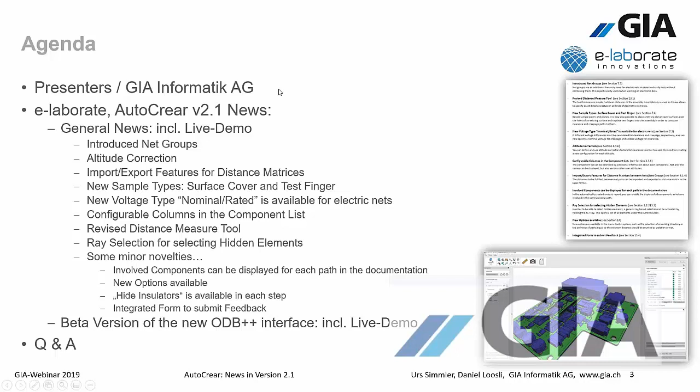Let's start with the presenters. Right now you hear Urs Simmler, I'm a CAD simulation specialist. I'm working for a reseller of e-laborate called GIA Informatik, and we are located in Switzerland.

My colleague, my sales guy of GIA, is Daniel Loosli. Here are his coordinates. And I'm very proud to announce Michael Martinek, the founder of the company e-laborate. He's the CEO, and he's the brilliant brain behind that great product AutoCrear. So he will show you quite soon the news of AutoCrear version 2.1. Many thanks to Michael for taking the time to join us.

Some words about GIA Informatik. GIA Informatik is a PTC reseller, located in the middle of Switzerland. Beside the CAD CAM products, we are also an SAP reseller. We have IT services, and we'd like to support our customers with the following products in the CAD environment.

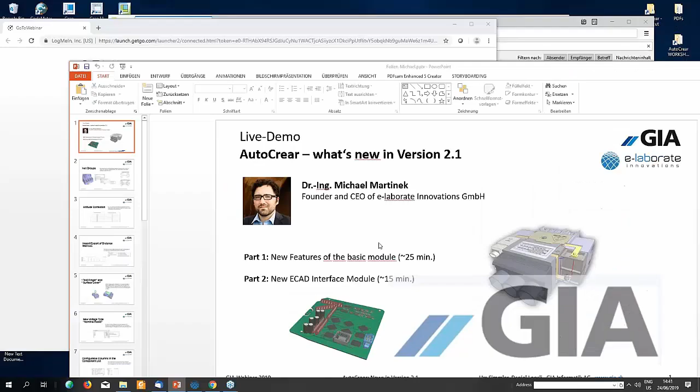The purpose of these non-uniform net groups lies more in the documentation. And for this I would like to give you an example. So let's switch to AutoCrear.

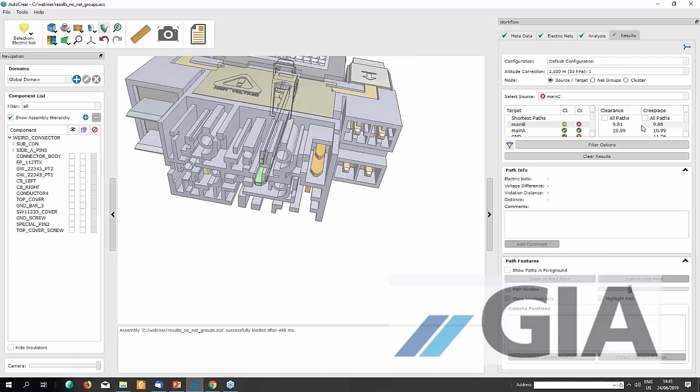Suppose you have some electric nets. Let's take these three nets here, Main A, Main B, and Main C. These are three individual nets which have requirements between each other. We can see the distances also in the classical way here. But now imagine you want to know what is the global minimum distance between the entire group of these three nets and, let's say, this screw, for example, here.

In order to get this, in the previous version, you would have to go through all the individual nets here, Main A, Main B, Main C, and then check the distance to the screw, and then add this information manually. So the documentation you would have to do manually as well. And this we can do better now with net groups.

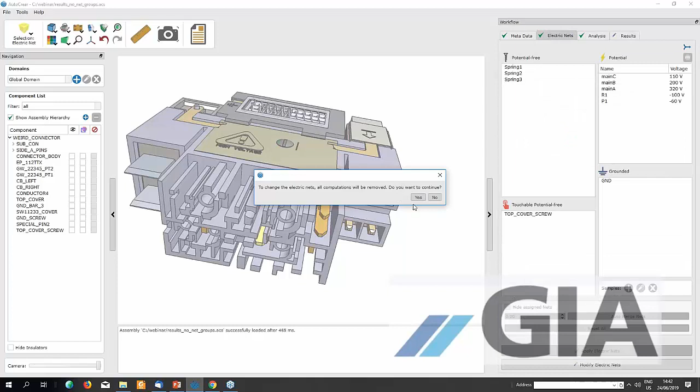So for this we go back to the electric net definition, and here I can select these three nets now and tell the program to group them together. Let's make a new net group here and call them Mains.

Here, as you already saw in this drop down, there are two net groups already here. These are global net groups. I will come to them later. Now we have a new group. I can also assign them, for example, to a group. These are the sides as they are on the two different sides of this assembly.

And now you have a new kind of display here in this list. You can also switch back to the traditional display where you see the individual nets. However, they are at least colored in the color of the group. You can also edit your local net groups. Here we have two active net groups. You could change the color, change some more settings.

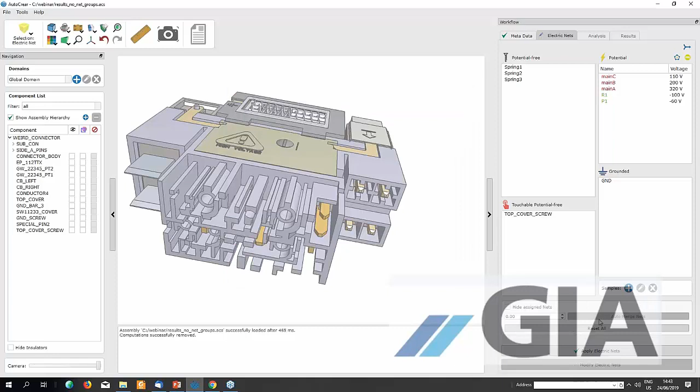And if I perform the analysis now with this kind of... this is more cumbersome than on my usual screen because I only have one screen here on my laptop. So yes. No. Only allowed to open it once.

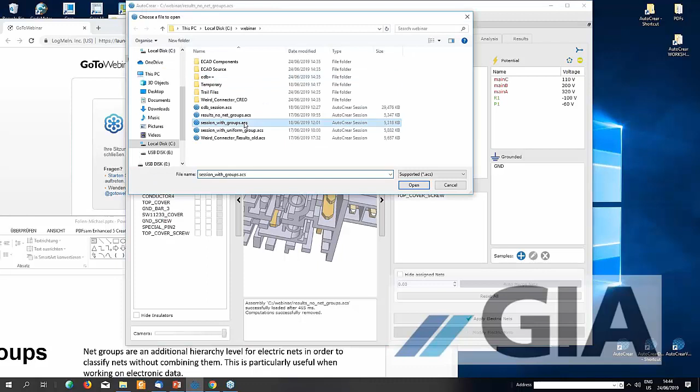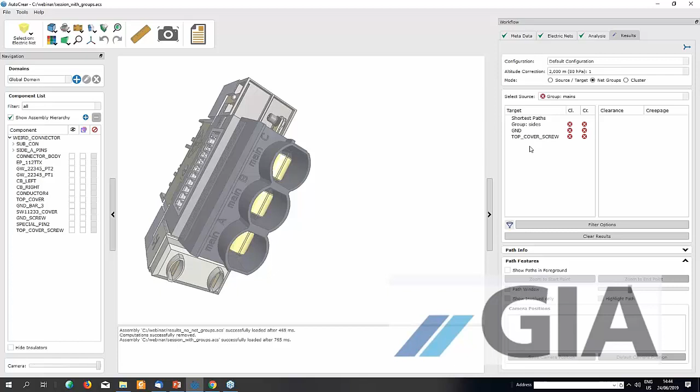So here we have a session with groups. So if we compute this in the setting we just made, we can switch here to a new kind of result display. So while in this mode you can still see the traditional individual nets, here in the net group setting, I can select an entire group as a source, and now I have this screw as a target, and this is exactly the list I wanted to have here. And I have this now in one single view.

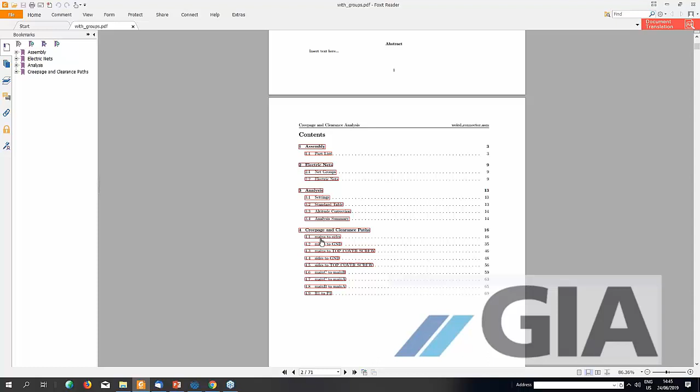This will also be in the documentation. Let's open an example here. So in the documentation, when I start the document tool, you now have a new option here, list net groups. If you activate this, the net groups will also be considered in the documentation, and will look like this. For example, here you have the mains to the top cover screw. This is the example we actually wanted to have.

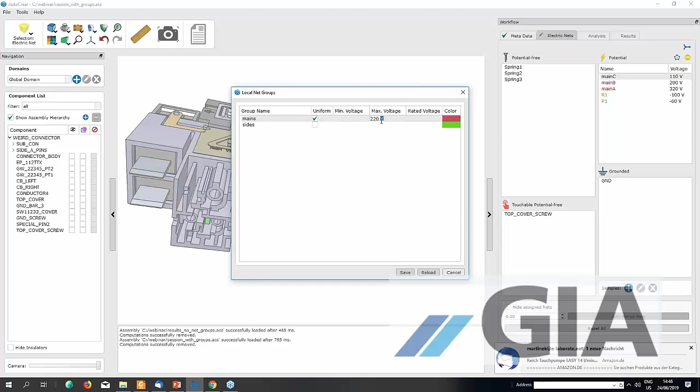In contrast to these non-uniform net groups, where all the individual nets inside the group retain their individual voltage values, we can also define uniform net groups. If I do this, let's edit the local net groups, make the mains uniform, then all the individual nets have the same voltage. I can type in the voltage here, let's say 100 volts, and then you see here that all the individual nets get the same voltage value.

And I cannot edit them anymore. And if I go on now to the analysis parameter, then you can see that you only have to choose the group, and you can define all the values to the other nets, or if I choose another net, you only have to define the distance to the group. You could have the same effect when you just merge together the nets to one net, but then you lose the information in the results tab, because when you do it with groups, you can still choose the individual nets display.

Then there is another thing about net groups. The net groups I just defined in the way you saw are locally defined in the session. They are also stored in the session. If I reopen the session again, they are still there. But if I open a new session, you would have to define these groups anew, unless you define global net groups, which you can do in the tools, net groups, and here we have predefined two global net groups, and they are always available as an option in the assignment of net groups, as you have seen here.

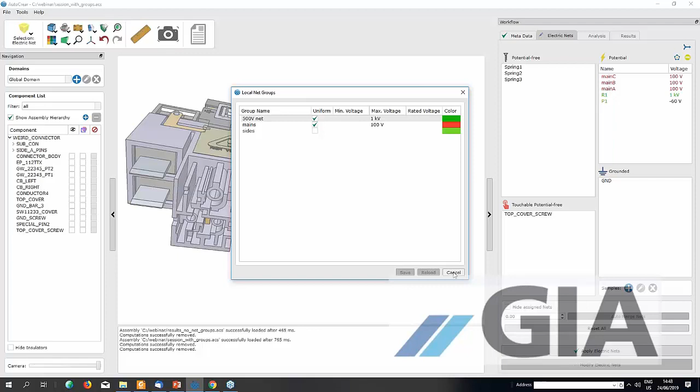Here are the global net groups and the local ones. If I assign a global net group, then you get a local copy of the global net group here in the local net groups, and I can make changes here, for example, change the color, change the voltage, without affecting the global net group. Okay, I think this is all I can say about net groups.

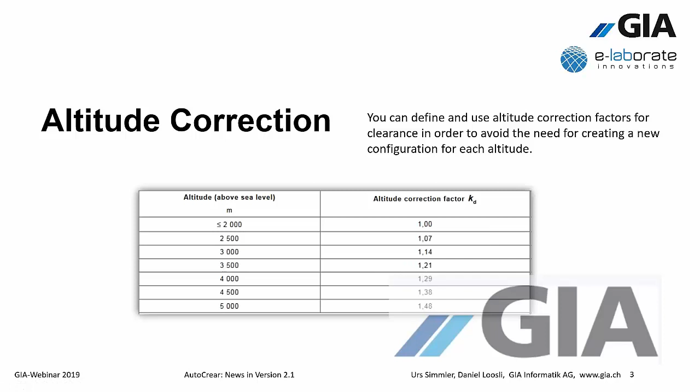Let's continue with the next feature, the altitude correction. Altitude correction is meant for assemblies which work above 2,000 meters sea level. So we have requirements in standard tables which are below this value, and if you go higher with your assembly, you need to multiply your distance values with a certain factor, and according to the height you see the factor here. This is one example of an industry standard, and you can now use such tables also in AutoCrear, and let me show you how. So let me first of all reload the session with the results.

So the first thing you need to do, as an initial step, is bring tables into the program. You can do this here in Tools, Altitude Correction, and this works very similarly to the standard tables. These tables are stored in an external file. You can edit them in Excel.

You can also edit them here in AutoCrear. You can also create new ones here in AutoCrear. By this you can bring as many tables into the program as you like. For example, I have established three of these altitude correction tables here, and once you define them, you can use them in the analysis tab.

So where you define your clearance and creepage requirements, here in this section you can now choose one of your tables, and if you do this, click apply, then here you will receive the information that you use altitude correction, and you also get the maximum multiplication factor. So when I perform a computation now, the standard values are taken, but the computation is done not to this clearance value, but to this multiplied with the maximum factor plus the tolerance, of course.

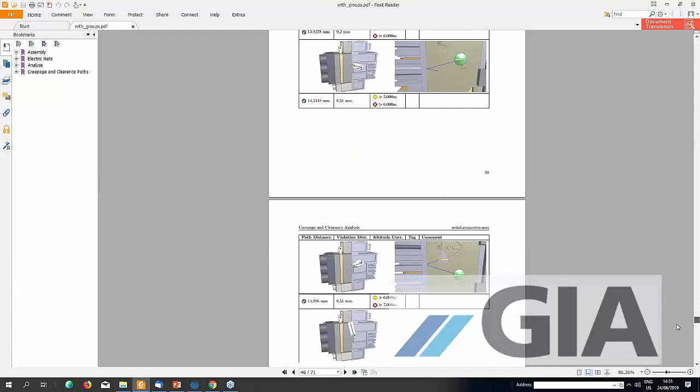Before that you would have to perform new analyses on different configurations, but now you can hold all your altitudes in one configuration. This also has an effect on the documentation. Let me try to find one here, for example. This is a clearance path which is okay for the basic rule, but you have here the additional information: above 6,000 meters it is a minor violation, and above 7,000 meters it is a major violation.

I would also like to point out that we recommend you use an altitude correction table only up to the value you require. Otherwise you would waste a lot of time. For example, if we always applied this table here, which goes up to 20,000 meters, the maximum factor for 20,000 meters is 14.5, and computing 14.5 times the clearance rule will probably take 200 times longer than the basic rule. So make tables only up to the height you require, in order not to waste your time with unnecessary computations.

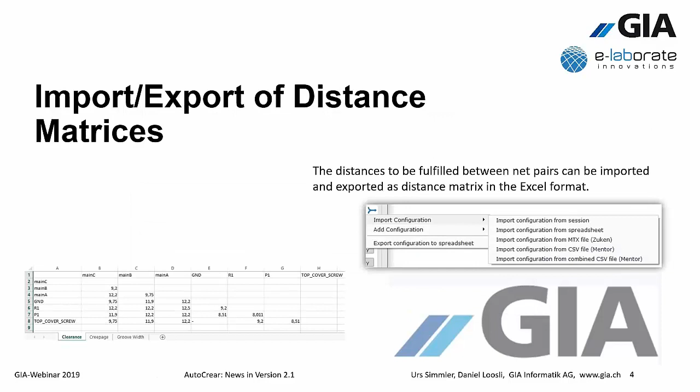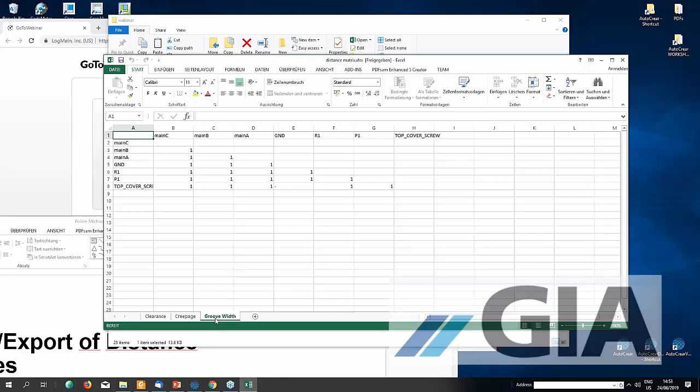The next feature I want to introduce is that you can import and export matrices for the user parameters. I have an example here. You might have such tables where you define distances directly between the net pairs, or also your net group names and net group pairs. One for clearance, one for creepage, one for groove width. And if you have such tables, you can now directly import them into AutoCrear.

Let's make a new configuration. So now we have a naked configuration. There are no distance values here, and now I can go to this option here, import configuration from spreadsheet. Now I can choose this matrix, and you see the values are automatically filled with the values from the matrix. You can also export such a matrix from the program with export configuration to spreadsheet. Then you can create such tables from your current parameter configuration.

So the next thing is the test finger and the surface cover, which we introduced as additional features for the samples. Samples are part of the electric net definition. In the previous version, you know, you can distribute points on your assembly or surfaces, and now we extended these features by these two additional elements. Let me show them here live. If I add a new sample here you see the options. These are the old ones, and now a surface cover

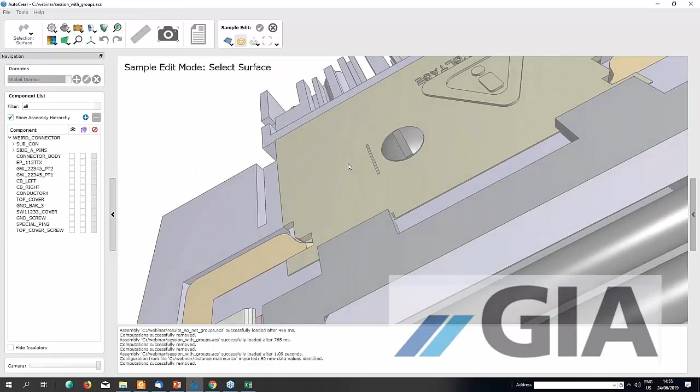is a way to cover holes in your assembly. For example, if you want to cover this hole because you might need to fulfill distances from the interior to a virtual metal foil covering it, then you can just click on this surface here and the holes will be covered automatically.

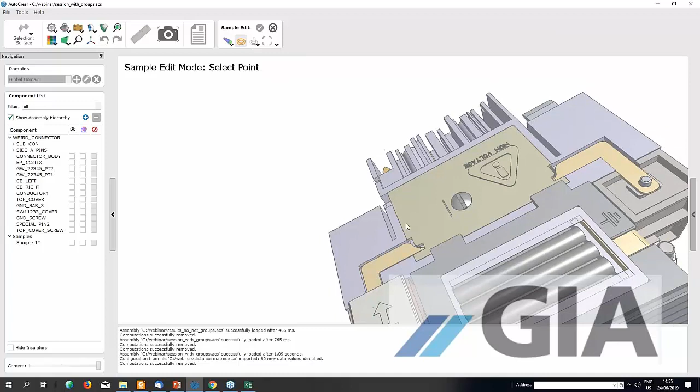The other new feature is the test finger, and we introduced the EN 61032. This expects you to define a reference point where the finger will initially be placed, for example this one, and it will be automatically oriented on the surface normal of the point you clicked. You can now additionally move this point along its normal.

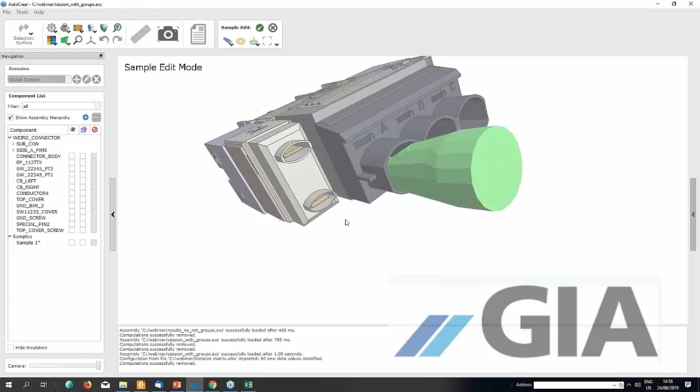Well, of course, there is more to come, with more handles where you can move this finger freely around. This is the first version, where you have a very simple way of placing this finger by a reference point and an offset.

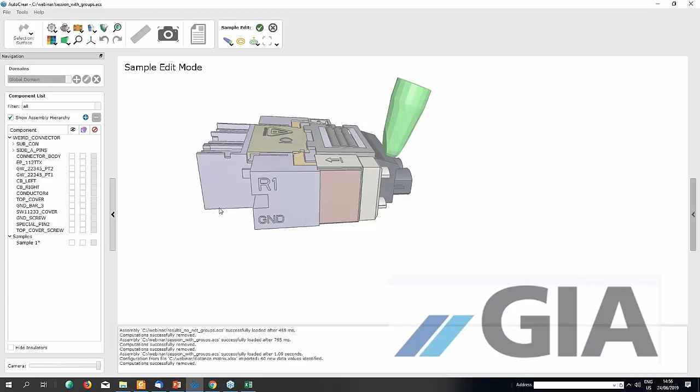And if you need other test fingers than the EN61032, then tell us and we can introduce more of these fingers here. And if you apply this, you have the finger as a regular electric net, and you can compute clearance and creepage paths to this finger.

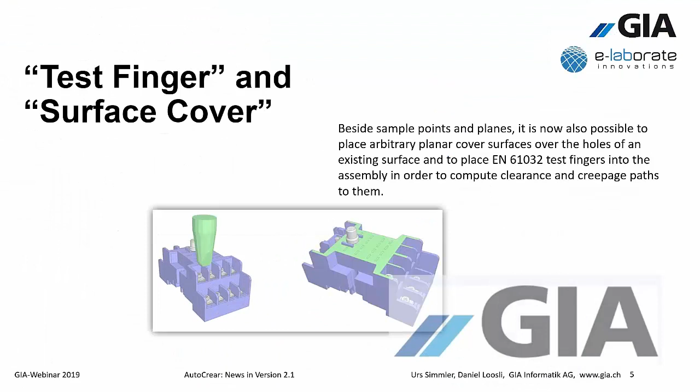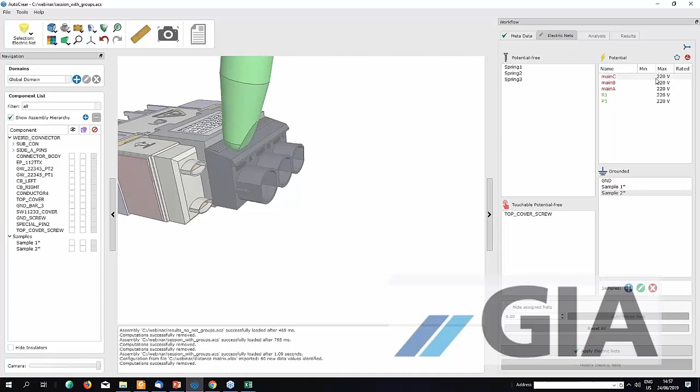So then we introduced a new type of voltage. This was motivated by the fact that we now can work on ECAD data as well. And in this ECAD data we have seen that the clearance and creepage often refer to different types of voltages. So the regular voltage is referring to the creepage values, and the clearance rules are often defined on the voltage difference according to some peak voltage, which occurs only for a very short amount of time.

For example, if this net has 220 volts actually in the working voltage, but in peak it can have 500, then you can type it in here, and for the standard tables the maximum voltage difference between two nets for the clearance will be taken from the rated voltages, whereas for the creepage it will be taken still from the regular voltages.

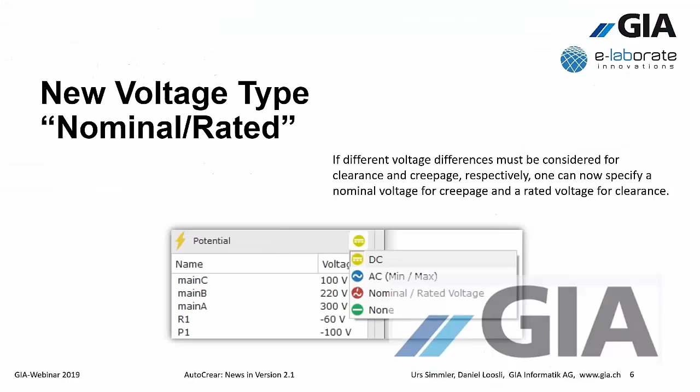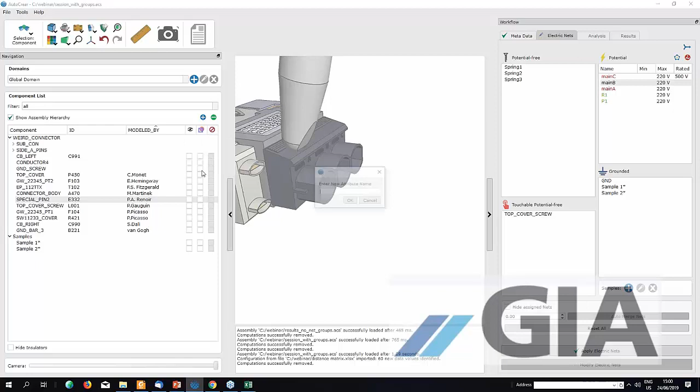What you can also do is you can change the values of these attributes locally. So you have a local copy now of your attributes. You can change it for your AutoCrear session if you like. Or you can also introduce entire new attributes which only live in your AutoCrear session, which is maybe suitable for documentation. If you need some attributes for your components documented in your analysis report, then you can type here arbitrary strings, and they will be documented then in the report without changing your original geometry, original CAD data.

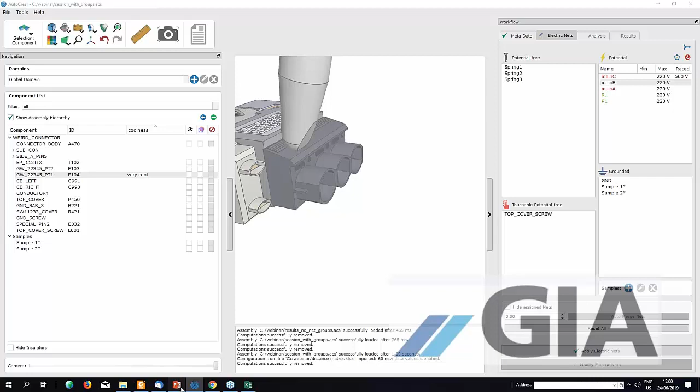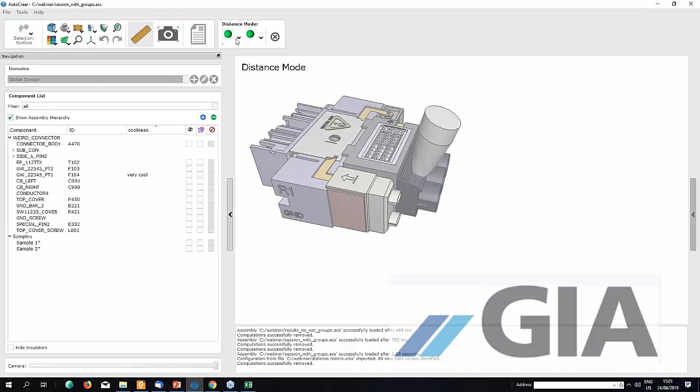So then we revised this tool where you can measure simple distances, which is a general tool which you find here. In the previous version, you could just select two arbitrary points. You get the Euclidean distance, and now you can choose more geometric elements. For example, a point, and it also makes an automatic snapping to the closest corner or closest edge. For example, I want to have the Euclidean distance between this point and, let's say, this surface here, and then you get the Euclidean distance here.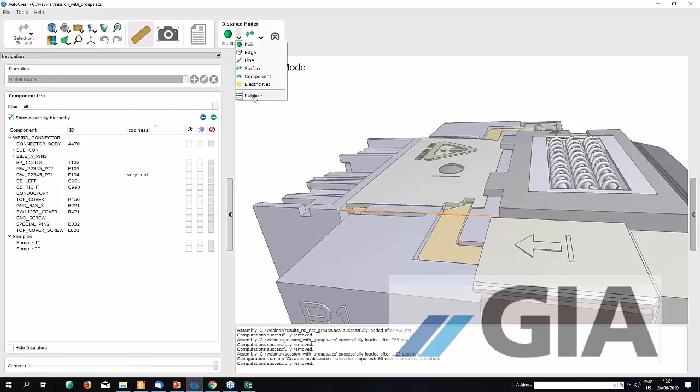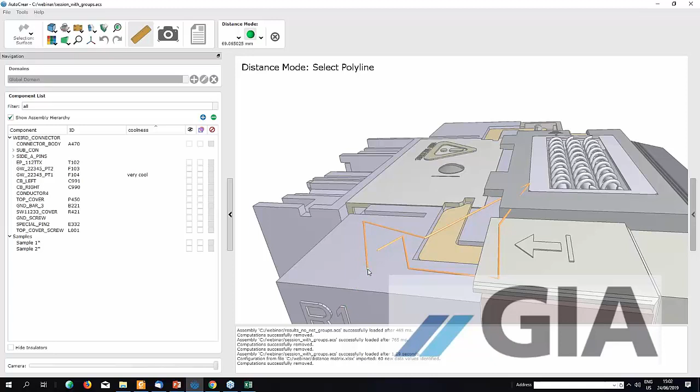This also works on other types of elements. Or you can also measure the distance of an arbitrary polyline. If I choose this option here, now I can draw a line here, and you get the distance of this line here in this section. This can be useful if you maybe miss some paths which were not computed for some reason, and you want to measure a manual path in certain areas. Then you can do it with this tool here. But actually, it's not necessary because you get a good path from the computations.

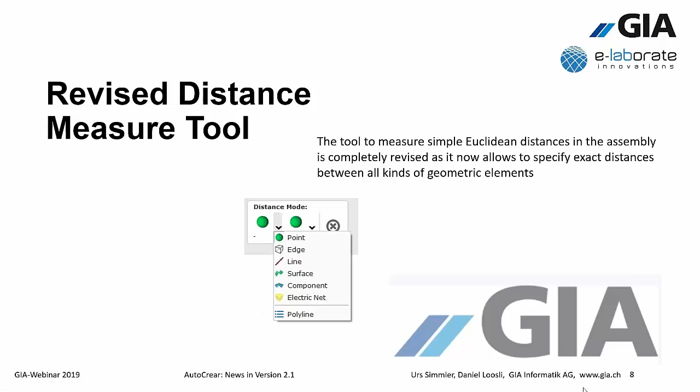So then this feature we introduced because a lot of CAD tools have this. If you select, here in this case a component, then you always get the first hit below your mouse pointer. If you want to select things which are further inside of the assembly, you can hold the Alt key, select again, and then you get an entire list of all elements which are below the mouse pointer. So it's a kind of ray we shoot into the assembly, and you get the list of all components we hit with this ray, and you can select them here.

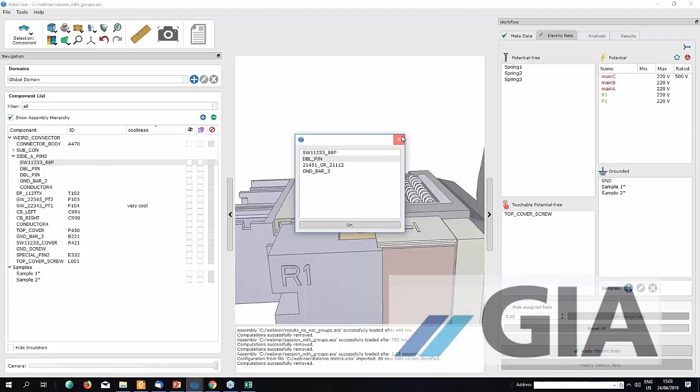This was inspired, as I said, from many CAD tools who have this feature. It was also a requirement of some users. Then we have some minor novelties. For example, you can activate the list of components in the documentation of the paths. So this is in the documentation panel, section clearance and creepage path group. And in this group here, you can activate list involved components, and then they will be shown in the document for each path.

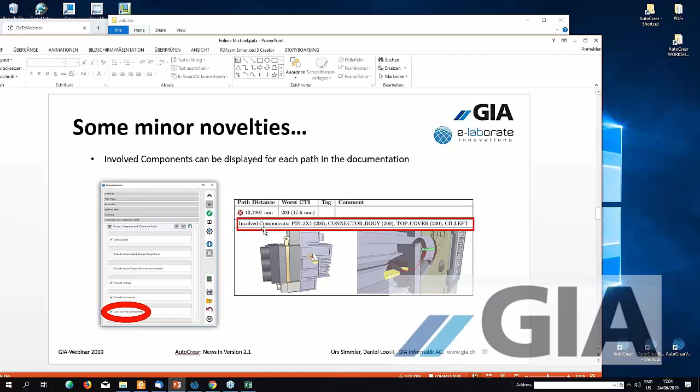Then we have introduced some new options. For example, you can now choose a working directory where temporary files are stored, and also where the ECAD components are stored, the database for components.

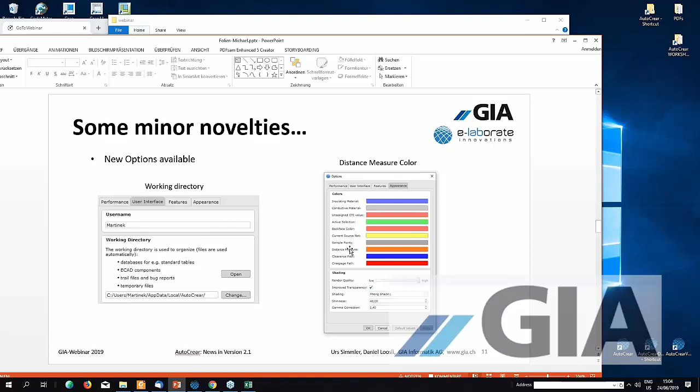Therefore, we introduced this feature, and I will come back to this later. Well, there's a new color you can specify for the distance measure tool, but this is not so worth mentioning here.

Then you might have missed the hide insulators checkbox, which was previously located in the electric net tab. In this position here, we now moved this element to the global section below the model tree. Some users complained about the fact that they can only activate this tool inside the electric net tab, but they would also like to hide the insulators, for example, in the analysis parameter definition. So we just moved it here so you can activate this feature everywhere.

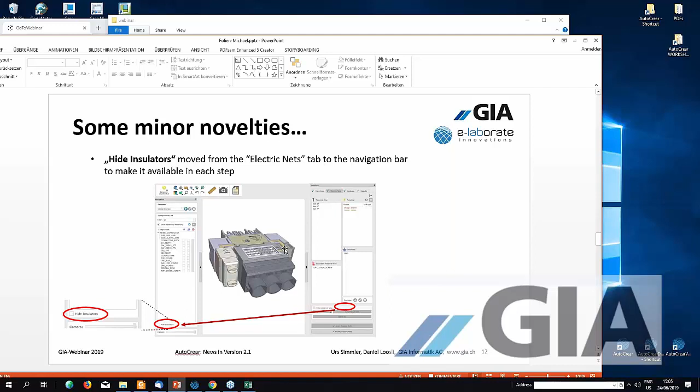The feature itself just hides every part which is fully insulating, which is very convenient for the electric net definition. Then there is a new feature in the help section of the menu where you can send us feedback. If you have some ideas to improve the program, ideas for new features, you can now directly address them here in the program.

Yeah, this was all about the novelties in the basic module.

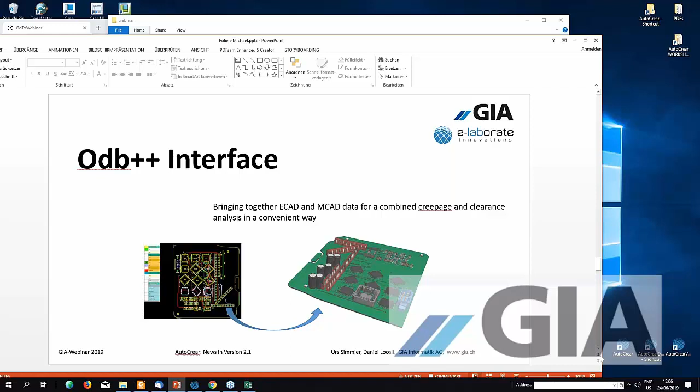So the ODB++ interface is a new module we introduced so you can directly import your ECAD data into AutoCrear. If you wanted to analyze your electronic data together with your mechanical data in AutoCrear, you would have to do this in this way. First you have your ECAD data, which is two-dimensional. You would somehow get a 3D component out of it, which you can mostly do with step export, so every ECAD system can make a step export.

Then you get a 3D version of your PCB, but well, the geometry is often not very clean. There are a lot of overlaps, a lot of unnecessary solid bodies in there. So when you import or export a step from a large PCB, then you will get thousands and thousands of components, and it's very hard to work with it because you can import this step, of course, in AutoCrear, but then all the meta information has to be assigned anew. So what is insulating, what is conductive, and then the next step you would have to define your electric nets,

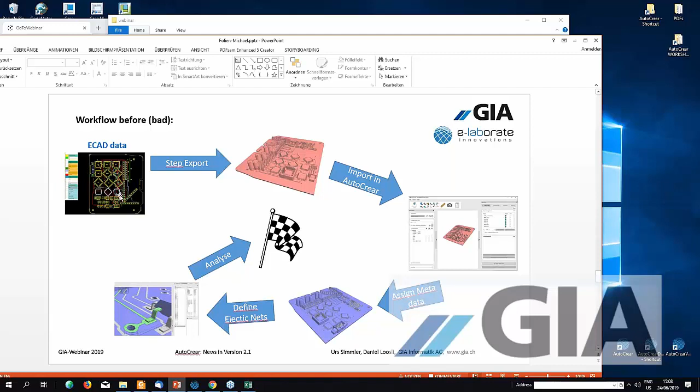and this can be very cumbersome because there are thousands of nets on your PCB, and then eventually you can analyze. But the crucial thing is actually you have defined everything already in the ECAD data, especially the electric networks. So we found that this was too cumbersome, and so we introduced this workflow now. So we developed an interface which can import ODB++ data.

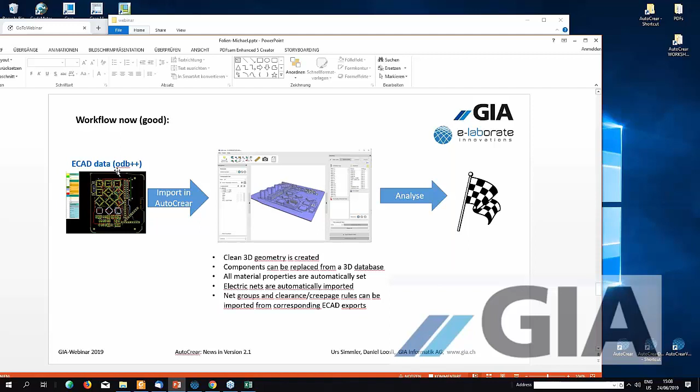ODB++ is an exchange format for ECAD data. Every common ECAD system should be able to export the data as ODB++. It's lossless. Let's do it like this so it's bigger. It's lossless, so all the electric net information is still there in the ODB++. When you import this in AutoCrear, then you get a clean 3D geometry. We generate a 3D object out of this data. And also the materials are already set, and the electric nets will also be automatically imported. So actually you can immediately start an analysis on this.

Well, of course you might want to combine this with your mechanical.

What was the last thing you could hear from me? Hello? Can you hear me? Yes. You explained the slide and then the audio was gone, so you can start with the live. Yeah, sorry, there is a button to mute my mic here, and this is very sensitive, so I accidentally hit this button.

So let's go through this with an example for the PCB import. So you see here in this bracket that it's still the beta version, and ODB files are either defined in a compressed file or in a directory. I might have a directory here. Yes, so this is the basic structure of ODB++ here. I can select this folder, import it, and then the first thing you get is an import mask.

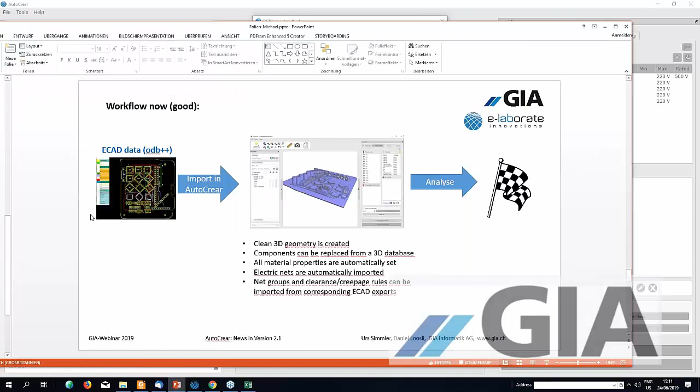The problem with components is they are 3D data which are not in the ECAD data. ECAD data is purely two-dimensional. Maybe I can zoom a bit more to this section here. Zooming to the center, you can see in yellow the components. So there are outlines in the ECAD data and also heights, but there is no 3D data inside the ECAD data. But eventually you might want to replace these components by the original data.

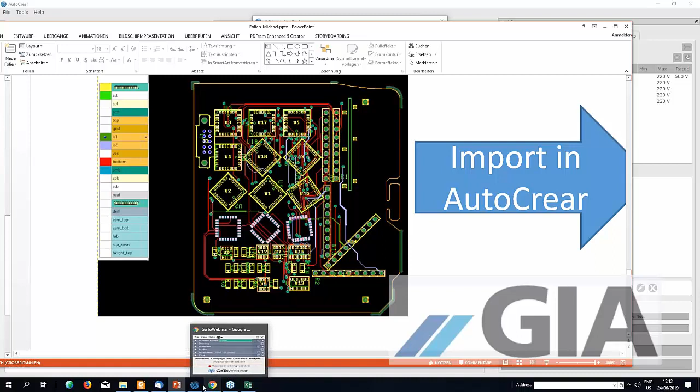So we introduced a way to do this also. But we also have the possibility that you import them in a simplified representation. And this means that we generate boxes of these components according to the outlines and the heights we know from the ODB data.

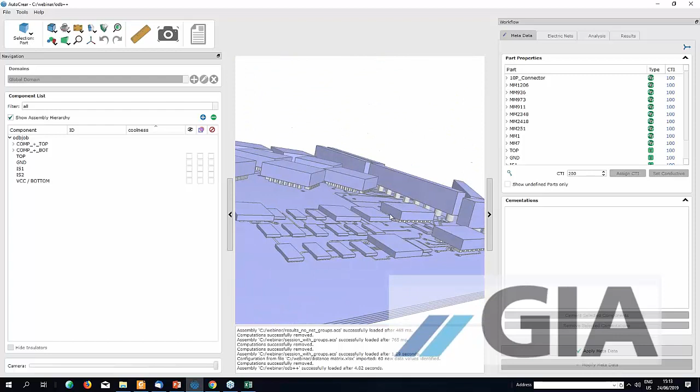If I switch to the material colors, you will see that there's nothing red, so everything is already assigned a value. Also the geometry of this import, and you see that it was very fast, we could import it in just 4 seconds. The geometry is very compact and clean, so every layer is one solid body. The signals are embedded as surfaces into this body, and we just imported all layers, not only the top and bottom layers, but all of them.

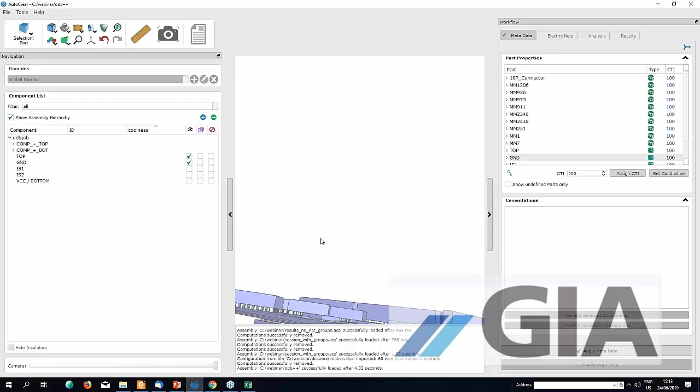Now what if you want to import your three-dimensional components as well? Well, here we have in the tools an option where you can administer your ECAD components. Now let me change the

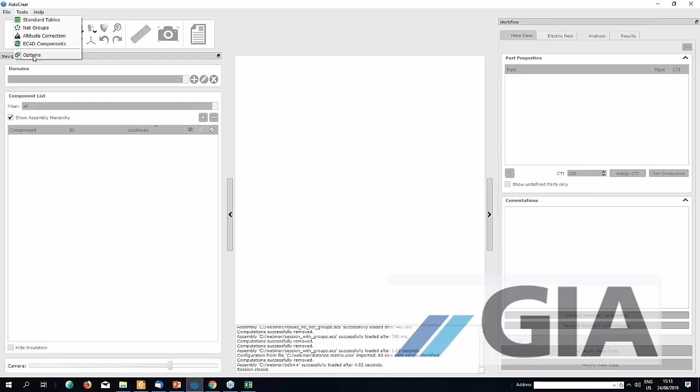working directory here for, oh no, this, yeah, I prepared the webinar on my other computer which has no internet, so I need to improvise here. So I change the working directory to my webinar folder. Okay, so yes, this looks better.

In this tool, you can administer your 3D database of components, and they are actually organized in the working directory in 2 folders. I can open the working directory here, and the 2 folders are, first of all, the ECAD source folder. Here you just place your original geometry files, step files or native files. Here, for example, we have a Creo file.

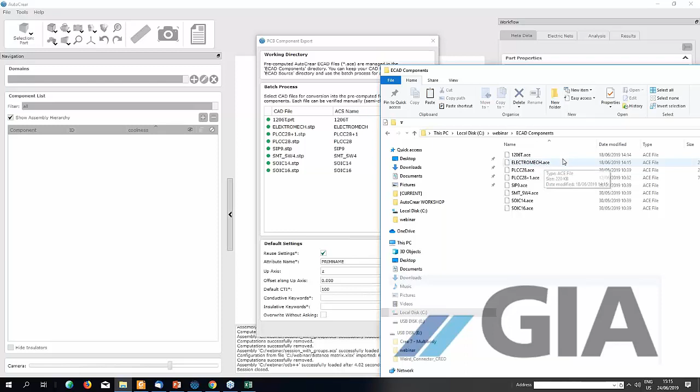And then we need an initial pre-process of this native data or geometry data into a proprietary format we introduced especially for this purpose, which is an ACE file, AutoCrear ECAD component. So every source file needs to have one ACE file. This is a pre-processed file for a quick import of the data. And you can also transfer the data from your source folder to the pre-processed ACE folder here in this batch process.

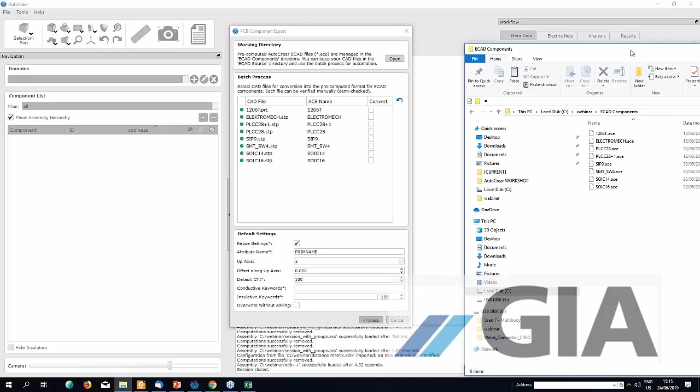And this green mark here on each original file tells you that there is an active ACE file in the database which is up to date. Now if I, for example, delete these two ACE files manually, and now I reload this, you will see here there is no green dot, so that means we need a pre-process of this data. And we can do this, and I recommend semi-automatic processing where every part is open and you can check some parameters.

You can set some default things, for example, what is your default up axis, the default CTI value you want to assign. You can also choose to import attributes for the matching with the references on the ECAD data. And if I start this batch process, now we have activated two assemblies. Then you see here the process. We are in process 1 of 2 assemblies.

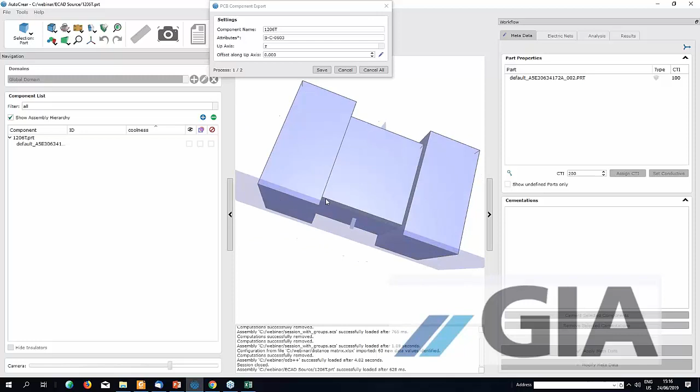Now you can check your assembly, and this, for example, it has a wrong axis. It's actually the y-axis. Oh no, it was actually good. The z-axis was correct, because of this plane here, it shows you the plane where it's placed on the PCB. So you could correct the axis if not correct. You could correct the offset, and what you also can do is you can define the surface parameters here. For example, this is conductive.

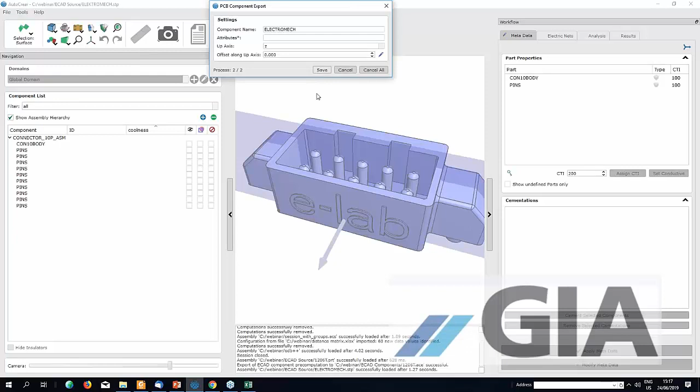And if everything is fine, I click Save, and now an ACE file is written into the ECAD component database. And here I immediately see, oh, this axis is not the Z-axis in this case; it's the Y-axis. But in general, if we have one database, it should be consistent. And also here, I see that the offset is wrong. I can offset this plane by selecting a reference offset here. I want it laying here in this plane on the PCB.

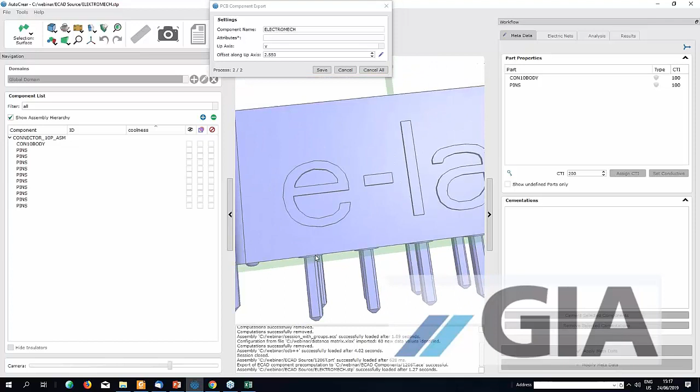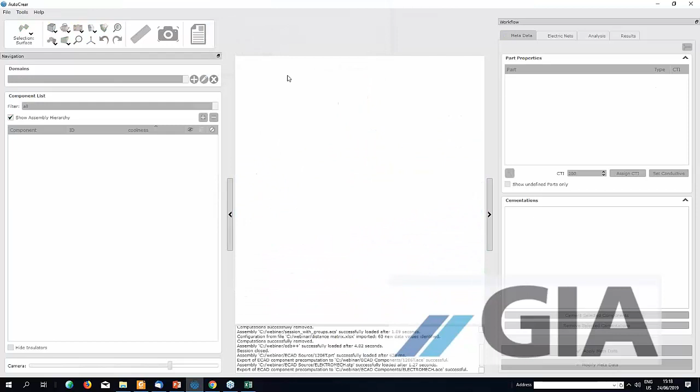And then again the material assignment. And now this part is also done. Save. The batch process is finished. So this is a one-time thing you have to do on your database, and if you have established such a database, then you can use it in the import. So let's import this PCB again and choose the detailed representation.

And now it lists all your components we found in the ODB data, which can be referenced either by part name or by package name. And either of them can be matched with the component name. It can be the name of the component in your data. It can also be attributes which you could specify in the import. In this case, it's obviously the package name we found in the ECAD component.

For the matching, there are different settings you can choose to ignore suffixes and so on. So there are a lot of matching options which are described in the manual. But in general, this should work automatically. If not, you always have the possibility to manually choose. So if you start writing, you get a list of everything which is in your database. But actually, it should work automatically. In this case, everything was matched here.

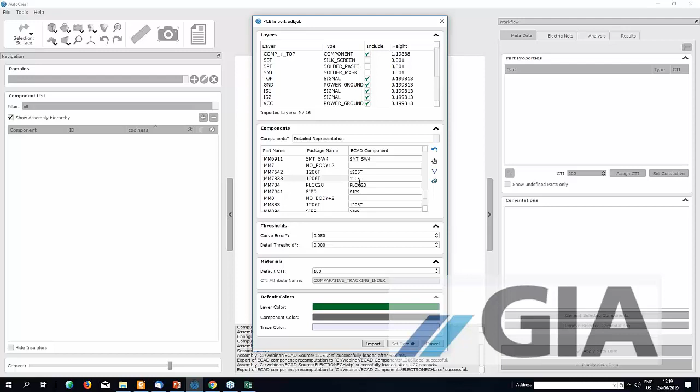And if I import this now, it will take the 3D data and place it automatically on the correct position. And you can see that all the materials are already set and we are ready to go on.

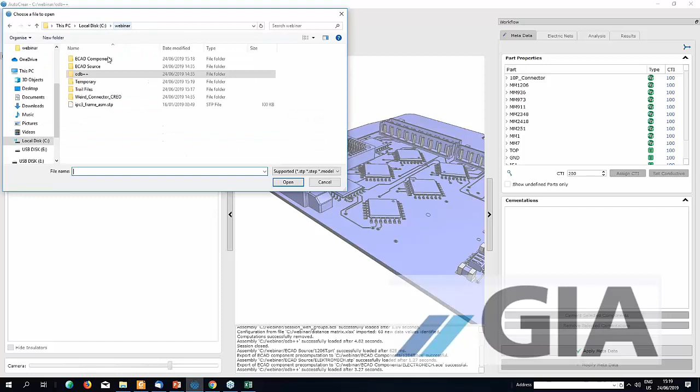Well, let us first combine this with mechanical data. I have a frame here, for example. That was wrong, I should have done add assembly, not import assembly. But now I can do it the other way around and just add the ODB file.

And luckily this goes very fast, this import. So also for very large PCBs, it's a matter of seconds, or in very huge assemblies, maybe a few minutes, where you get this nice 3D version of the PCB.

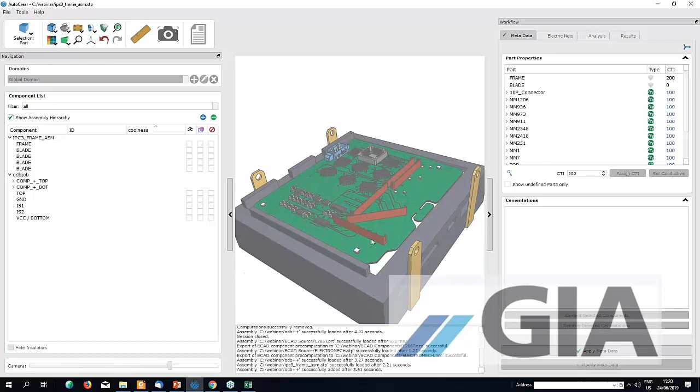And now we would have to assign the materials for the mechanical parts. And we have a nice 3D model of our mechanics and the PCB generated in no time.

If I apply this now and move on to the electric net tab, you will notice in a few seconds that there is already a lot of electric networks in your list of potential nets. And these come directly from the ECAD data.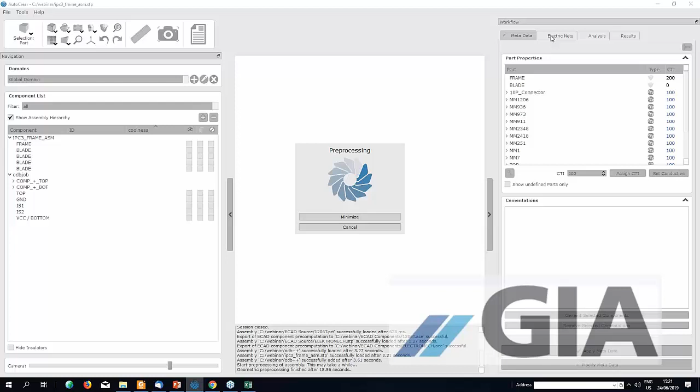So here, these nets are the original nets, and we don't need voltages here, the original nets from your ECAD data. Let's switch back to material so we can see them better. So you can also choose a net here. See, okay, this is the net B7 from your data.

Now you see that there is a lot of electric networks, and the thing with ECAD data we learned is that you have thousands of nets defined on your PCB, but there is only a limited amount of net groups on which the clearance and creepage rules are defined. So actually you want to work on the net groups rather than these thousands of nets, because otherwise you would have to define your clearance and creepage rules here for this matrix, and this is cumbersome.

So let's go back. In most cases, this information is also in your ECAD system. We learned recently that you can also export them in ODB++, but most of our users have them in an extra file. In Zuken, for example, it's an RUF file. In Mentor, it's a CSV file. These are the two we support so far, but if you have other systems, just provide us the files and we can write parsers for them.

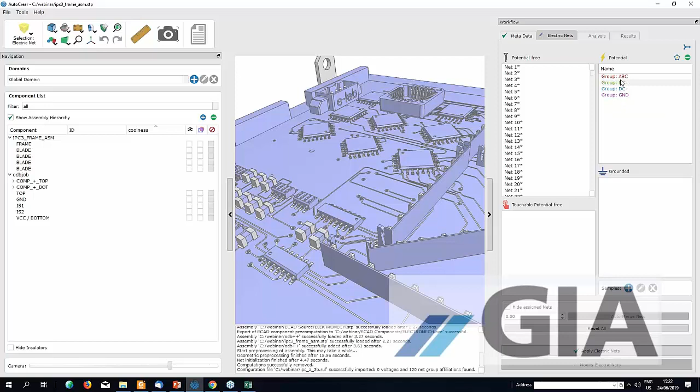So these files contain net group information. In the RUF file, I should have something here, and then switch to the net group. Then you see that we have everything now combined into 4 net groups, and if I go on, I would only have to define the distances between the net groups, and all the individual nets will get these clearance and creepage rules.

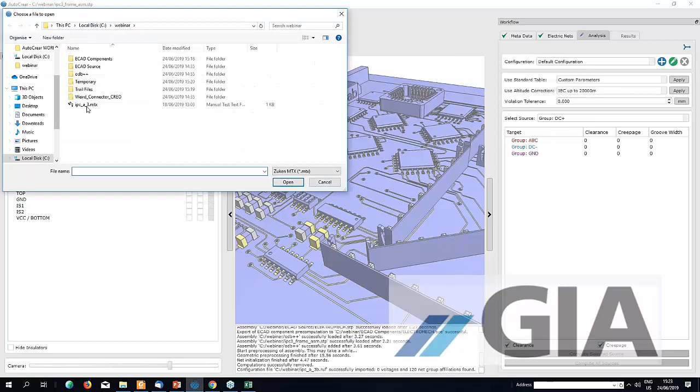And also these rules might be defined in your ECAD system, and just as with the net groups, you can export them in a file. In Zuken it's an MTX file, and you can import it here in this section in AutoCrear. So I import the MTX file from Zuken, and then I can also choose which rules I want to apply for clearance and creepage found in the Zuken file.

And then here everything is already assigned, and I can start an analysis directly on this. I think I have prepared some results here on this exact data set. Yes, this is an example now of a result.

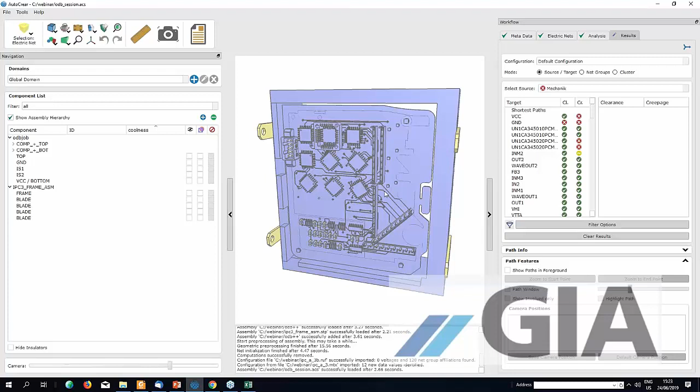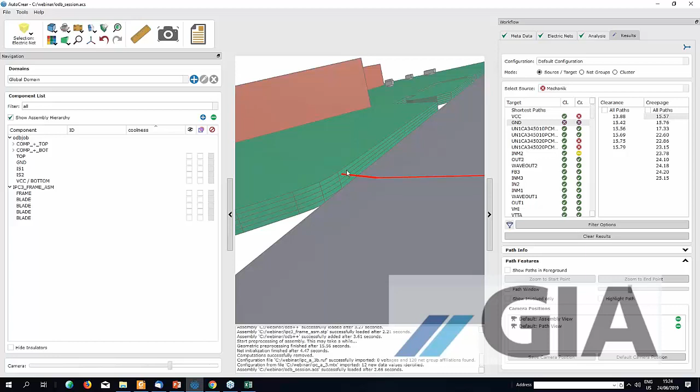So I have the mechanics here, these 4 mechanical parts, and now I want to know the shortest distance to this, to the ground. And here it is. And it's not even one of the top layers, it goes into one of the inner layers. So 'show involved only' is a nice feature here.

Yes, and so on. So this is a very convenient workflow now to bring together your mechanical and your electronic data to perform a combined analysis with the minimum amount of manual definitions here.

And as I said, this feature is in beta mode now. It's freely available for every user, at least until the end of this year. So feel free to test it with your data and also provide us with feedback. We are not the experts in ECAD, you are, but we are the guys who can make everything happen if you have further requirements concerning this workflow.

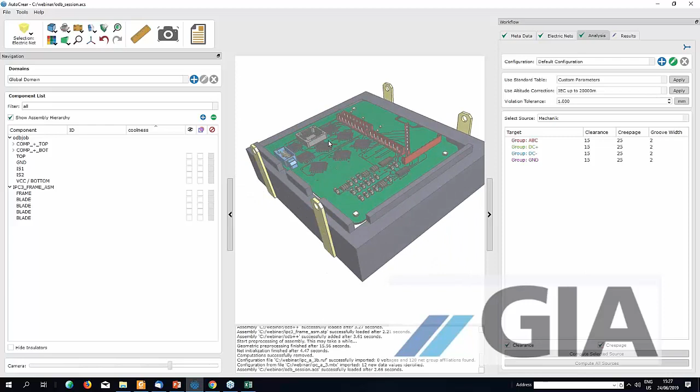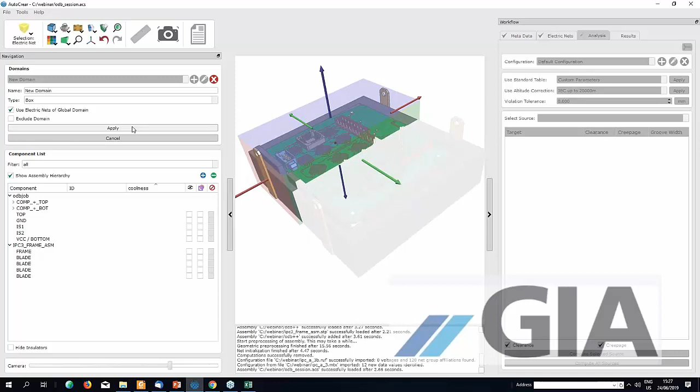You can work with domains. You can make domains where you can change the geometric extents. But each domain can only have, yeah, you can make a configuration for this domain, but in order to compute the other side with a different setting, you would have to make a new domain. So one combined possibility - to define regions, define different configurations on the regions, and perform one analysis on the entire assembly with different regions - this is not there yet, but it will be in the future.

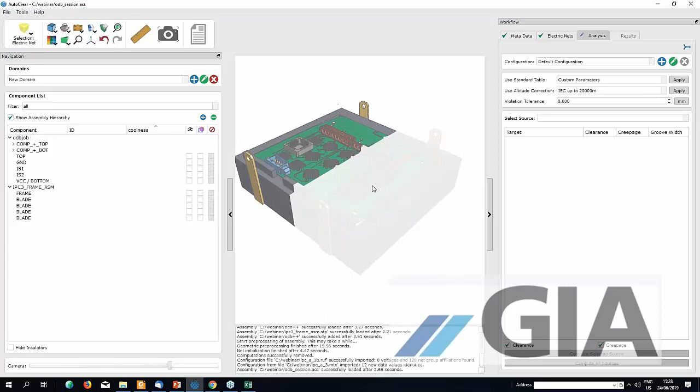It's not easy because especially the user input will be hard to establish. Defining boxes is simple, but you might have more complex regions which you have to define in 3D somehow. We will make our thoughts about this, and in one of the future versions this will be available. Well, I hope this was the feature you were asking for.

As far as I understood it, it was. And if you have any further questions, don't hesitate contacting us, send us an email, or contact us by phone. There is another question: are PCB tolerances accounted for in AutoCrear, or are there capabilities to account for this?

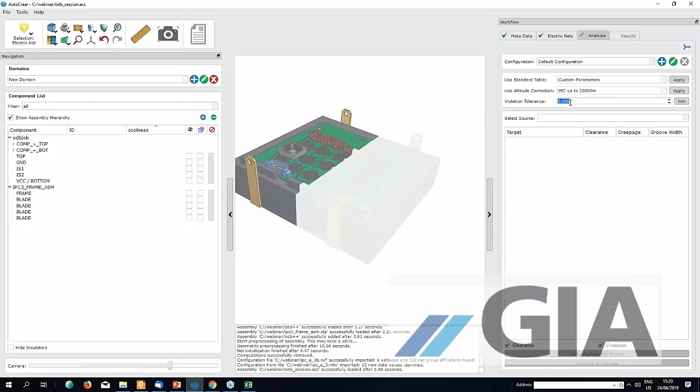Tolerances is a very interesting topic. Well, you can add a tolerance here in the analysis parameters. So even if you have your, let's go back to the other domain, you have here your clearance and creepage distances according to the MTX import or to these requirements you have. But you can also add a tolerance here, either absolute or relative - for example, add 10% tolerance, and then not only these 15 millimeters will be considered as critical, but also plus 10 percent. So this is the way you can address tolerances now.

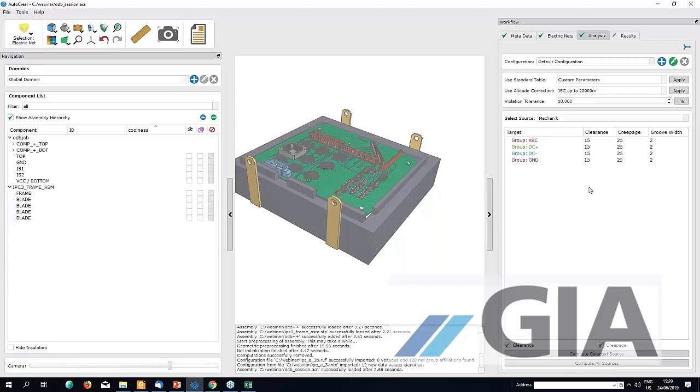In the future, we also plan to introduce real geometry-based tolerances, so that you can select certain elements and tell the program that this element can be moved by 1-2 millimeters in a certain direction, and then we will address this tolerance geometrically. But this is very hard, and this is also future work. Still, AutoCrear is our only solution, and we are not developing any other solution than this, and we will work on this day by day in order to bring all the requirements into one program concerning clearance and creepage.